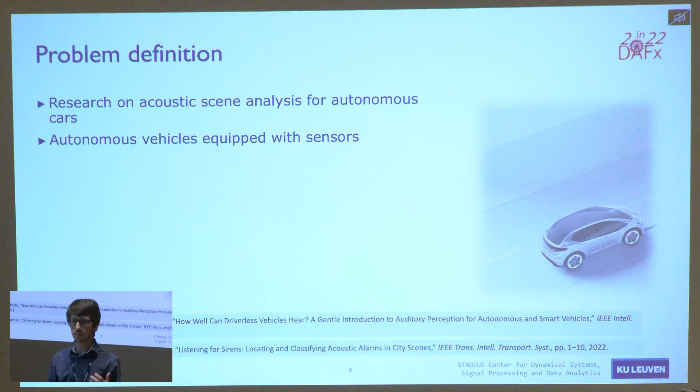Why do we need this software? In recent years, we have seen a lot of development of autonomous driving vehicles by the automotive industries, and the cars have been equipped with a lot of sensors that enable them to perceive the surroundings. And most of the research has been focusing on visual scene analysis, exploiting sensors like lidars and cameras.

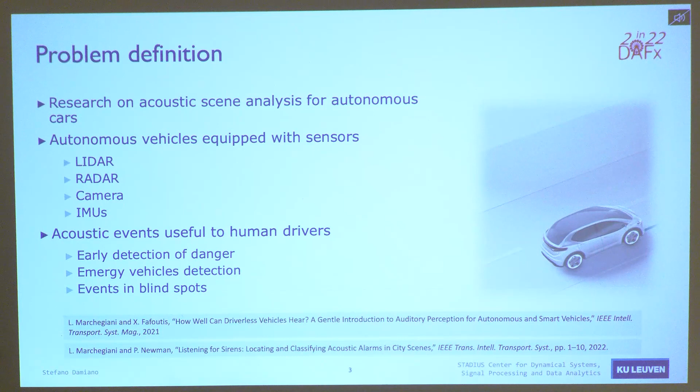But we, as human drivers, do not only use our eyes to perceive the environment, but also exploit our ears to detect some useful acoustic events happening on a road. Think, for example, of a car that is honking that could imply some danger around, or some emergency vehicle with the siren active, or in general some events that happen in blind spots, but that we can perceive thanks to the sound they emit. This is why currently many companies are equipping cars with microphone arrays to process also audio events to enhance the safety and the perceptual awareness of the car.

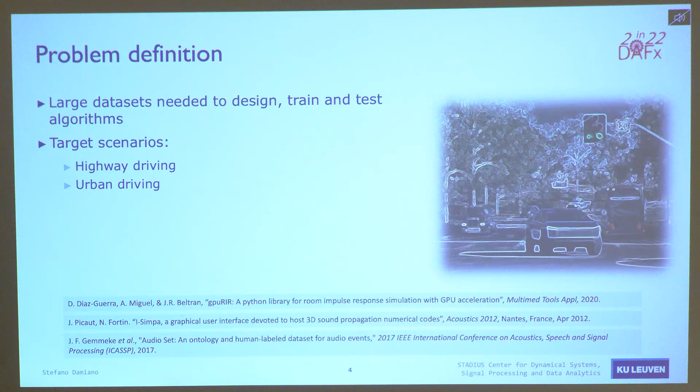In order to develop such algorithms, we need large data sets, especially when it comes to deep learning approaches that are considered a sort of state of the art. And we have two mostly targeted scenarios: the highway driving, in which a car is driving in an open field, usually at high speed, or the urban environment, in which the car can be parked or moving at lower speed usually. And there are a lot of acoustic reflections due to buildings.

Now, it is always difficult to collect data, and this is why there are few data sets available, and most of the actual research is using simulators. However, most of the existing tools target indoor simulations or noise control applications, and therefore can hardly be used to generate such specific data sets. For this reason, we decided to develop our own tool that we then deployed in a Python package.

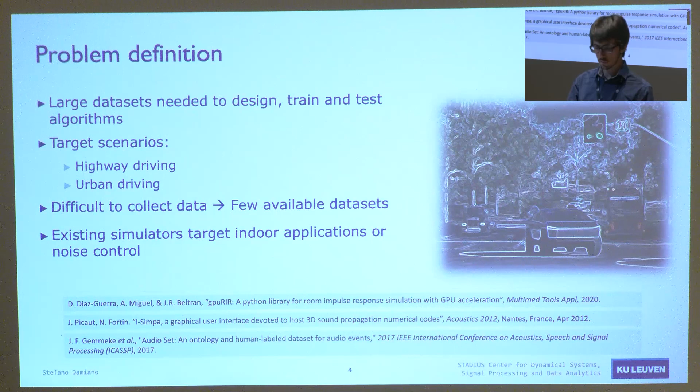Now, the highway scenario is the scenario that we are targeting in this specific work and has some particular characteristics. First, there is always a relative motion between sources and microphones, and due to the high speed, the Doppler effect has an important impact on the simulated signal. Then usually we have one main reflection, or only one reflection, that comes from the ground, and the atmospheric absorption is also important due to the large distances traveled by the sound waves.

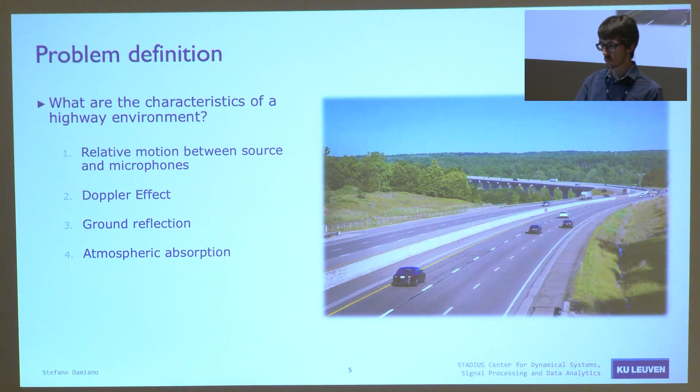Now, to model and simulate acoustic propagation in the literature, there is a large use of delay lines, which are simple DSP blocks that take a signal and delay that signal by a certain number of samples m. And if m changes over time, they are called variable length delay lines and can be implemented using circular array buffers. In this case, we have a write pointer that writes the input signal sample by sample into the delay line, and its position is incremented by 1 at each simulation instant.

And then we have one or more read pointers that are used to read the signal out of the delay line. If the distance between these pointers is governed by the sound propagation laws, then we get a simulation of sound propagation. In this case, the delay m can have fractional values, and in order to deal with that, there are fractional delay lines that are just normal delay lines followed by an interpolation filter. This is widely used to simulate acoustic propagation and Doppler effect, and we started from that and decided to include also the simulation of the reflection and of the air absorption that I discussed in the previous slide.

So this represents basically the architecture that we are trying to simulate. We have a single omnidirectional moving sound source and an array of microphones that are static and omnidirectional, and we want to simulate both the direct path and the reflected path, with the ground surface as the only reflecting surface. This is the architecture that we have implemented.

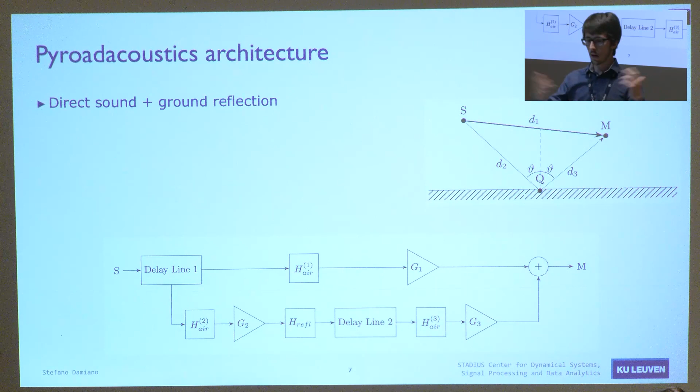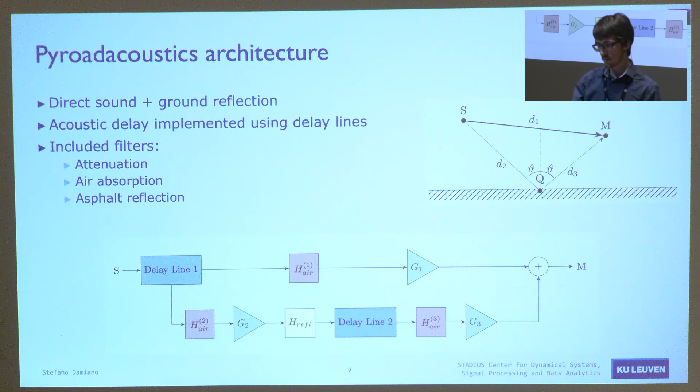It's modular. You can choose to have different signal paths, but basically we have two delay lines that implement the acoustic propagation. And then we have some filters: 3 gain elements that implement the attenuation due to the spherical propagation of sound, 3 air absorption filters that are FIR that implement the air absorption along the 3 different paths that you can see there, and 1 reflection filter that implements the properties of the asphalt surface. I will now get into more details about all these components.

So as I said, the first issue is that we need to deal with the fractional delays, and we decided to implement 3 different interpolation filters in the simulator that are linear, all-pass, and sinc interpolators that are commonly used in the literature. Now, these 3 filters have a different performance and a different complexity.

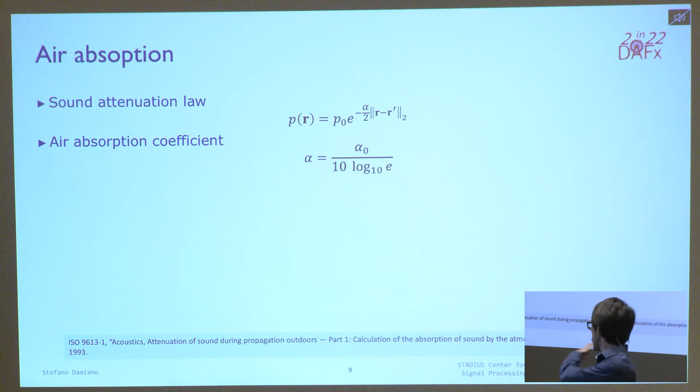Then the first filter is the air absorption filter, and in order to model that, we started from the sound propagation law that allows us to compute the pressure at a generic position R, starting from the emitted pressure, and given the distance between the source and the microphone and the air absorption coefficients alpha, that are usually given in a dB scale in the ISO standard where they are defined, and they depend on frequency, and also on atmospheric parameters, in particular temperature, pressure, and relative humidity.

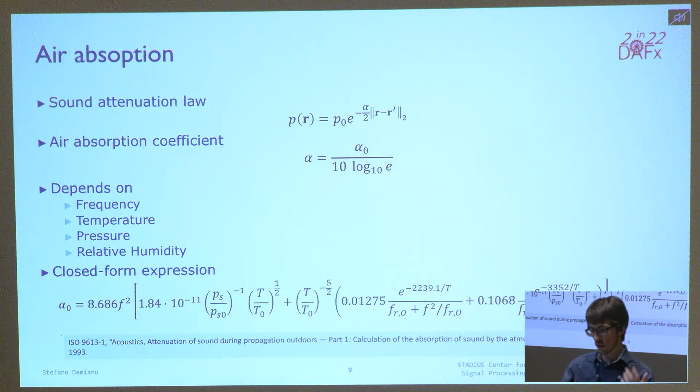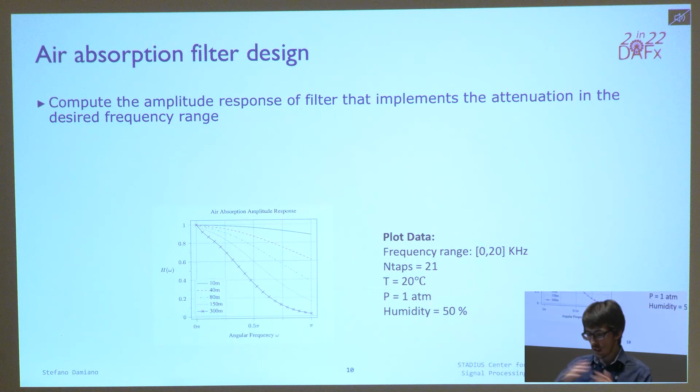We have a closed form expression for these coefficients that allows us, together with the sound attenuation law, to compute the amplitude response of a filter, given these attenuations at different frequencies, and this filter can implement the attenuation in a desired frequency range, as is depicted here. Now, from this, we can use some technique, for example, the weighted least squares method, in order to retrieve the impulse response of the filter. This is implemented by that function in Python.

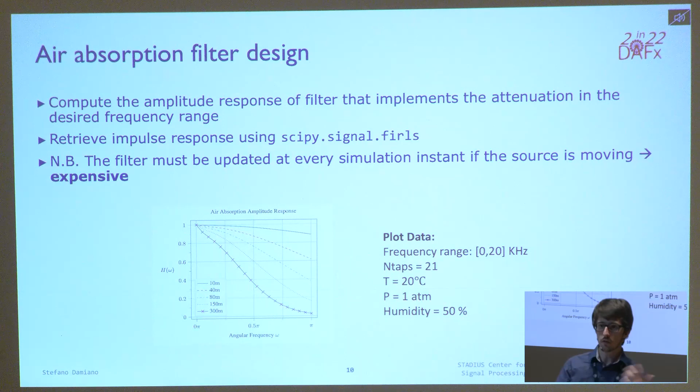But the problem with that is that the procedure is really expensive, since the source is moving, so the filter must be updated at every simulation instant. And if you remember, we have 3 paths, so we have 3 filters that need to be updated. Thus, to improve the speed, we performed a custom implementation of the weighted least squares method. So we start from a given set of frequencies at which we know the desired amplitude response, and we want to design an impulse response of a filter of L taps.

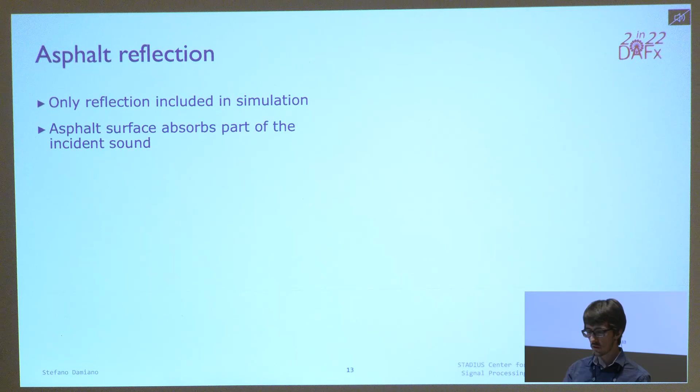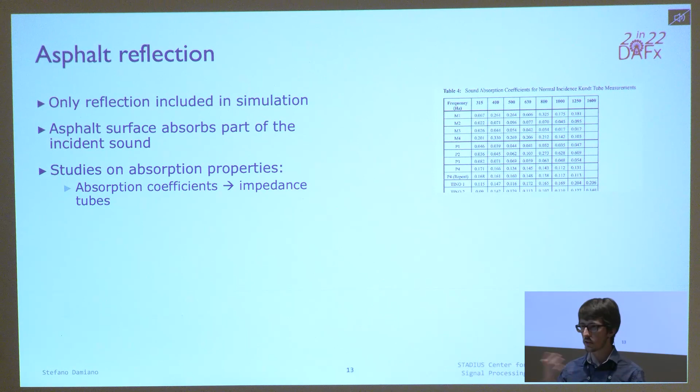Then the last filter that we implemented is the asphalt reflection filter. In order to do that, we started from studying the absorption properties of asphalt surfaces that have been widely studied in the literature. And we get some tables where we can find asphalt absorption coefficients that define how sound is absorbed at different frequencies. These are computed using impedance tubes and depend on the material, so each row of that table is a different asphalt mixture and has different absorption properties, and also depend on the incidence angle, and in the tables we find the normal incidence absorption coefficients.

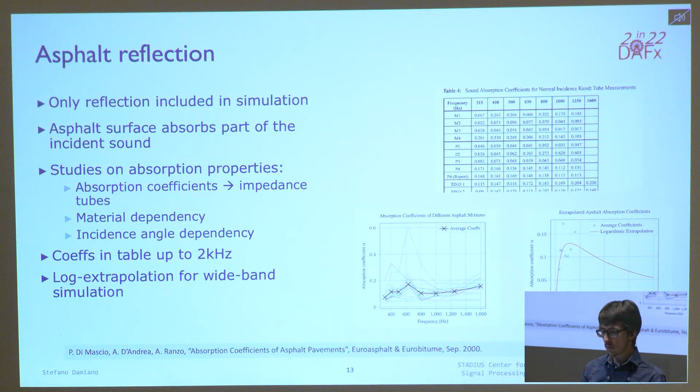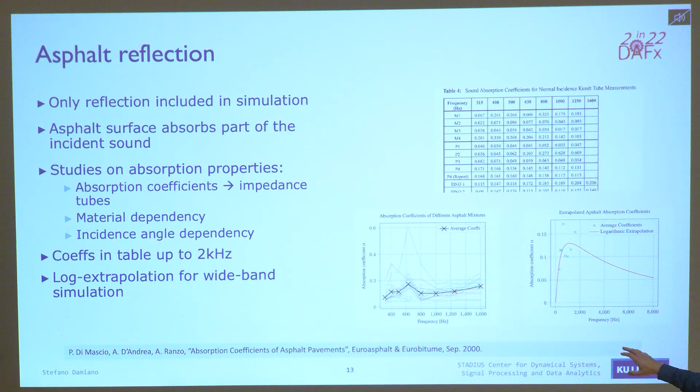Now, as you may notice, we have the absorption coefficients up to around 2 kHz, and in order to enable simulation of a wideband signal, we performed a logarithmic extrapolation. So on this left-hand plot, you can see the coefficients of the table that are plotted with their average as a thick black line. And on the right, we have the extrapolated coefficients. We are interested, of course, in the reflection, not in the absorption, and I will get to that now.

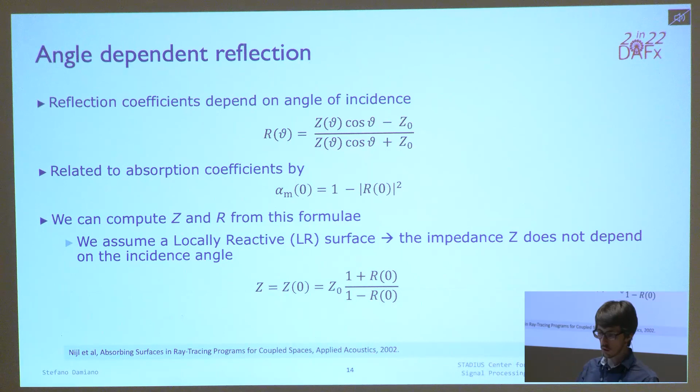Now, if we assume a locally reactive surface, we basically assume that the impedance Z does not depend on the incidence angle. Therefore, it becomes a constant in the first equation of this slide. And therefore, we can compute R at a set of frequencies. And from these coefficients, we can then design a filter. We can get the amplitude response of an FIR filter and retrieve the impulse response using the same method.

Now I would really like to conclude with some demos, because that's a lot of words, but it's effective to make you listen to some sound. But I don't know if I am able to do that.

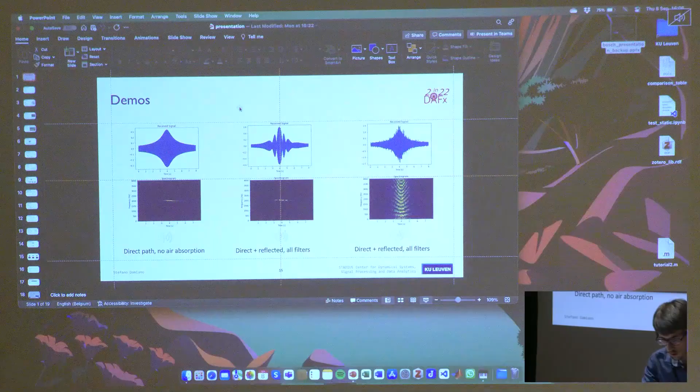Do we have some jack cable, maybe? Is maybe this one? Yes. Can I try? Yeah, it's here. Yes. I will use this for sound output. Let me try again.

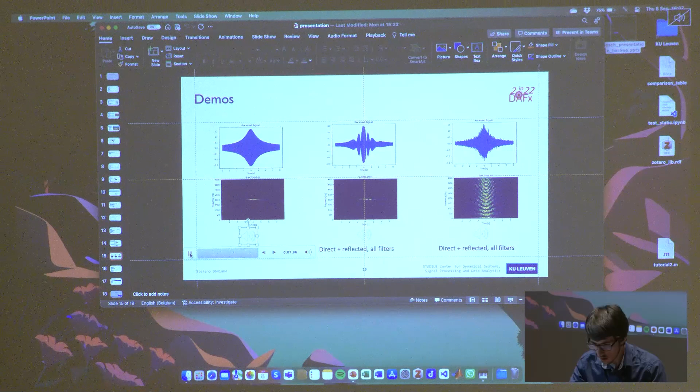No, it's coming from here. Maybe this one. Okay, I got it. Yeah. It was coming from there. Okay, so sorry for the inconvenience.

I will build up the complexities with these demos. So I will start with a simple scenario in which I have just a source that is moving along a straight trajectory and emitting a sinusoidal signal, and only the direct sound is simulated. So this is basically Doppler effect. Now I will add also the reflection and the air absorption.

You can hear some interference between the direct and the reflected component. This is known as comb filtering, as you probably know. And in order to look at this better, I simulated the same scenario, but with a white noise source. You can clearly see the interference patterns there, and you can also listen to the effect. Sounds like a plane that is taking off.

Then I'm also going to show some more realistic demos in our road scenarios. I will consider one source of interest, so first a siren and then a car honking, two moving noise sources that are vehicles, and three static noise sources that are basically ambient sounds. All the samples have been collected on online free repositories and simulated via this software.

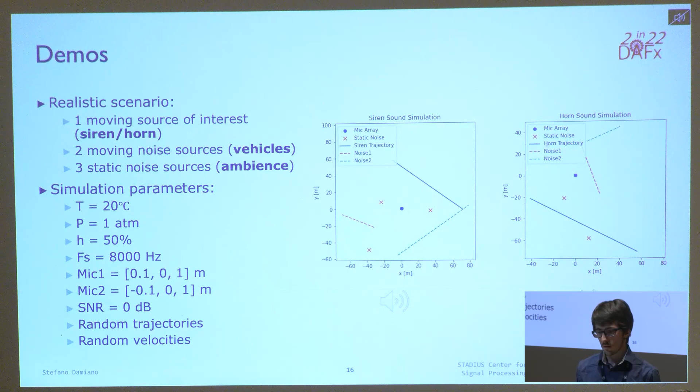Since we can simulate just one source at a time, I repeated the simulations multiple times to build up the complexity with a set of fixed simulation parameters. And I have set random trajectories and velocities that you can see here. So the first example is a siren sound, and it sounds like this. It's also stereo, maybe you could hear something moving. And the second one is a horn sound. Okay, so this is to give an idea of what you can get.